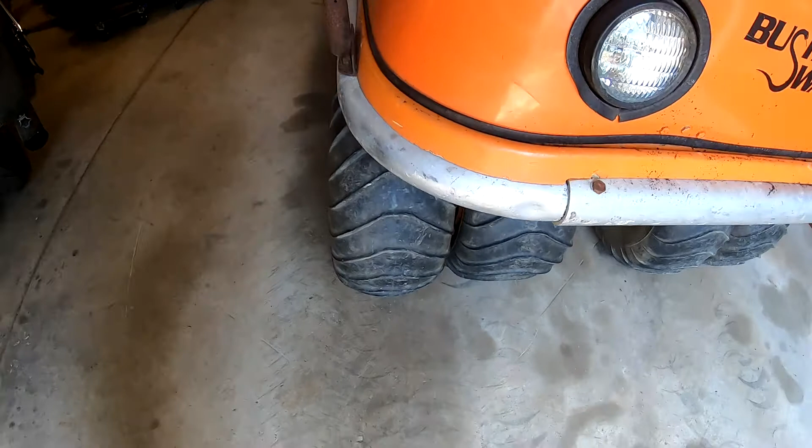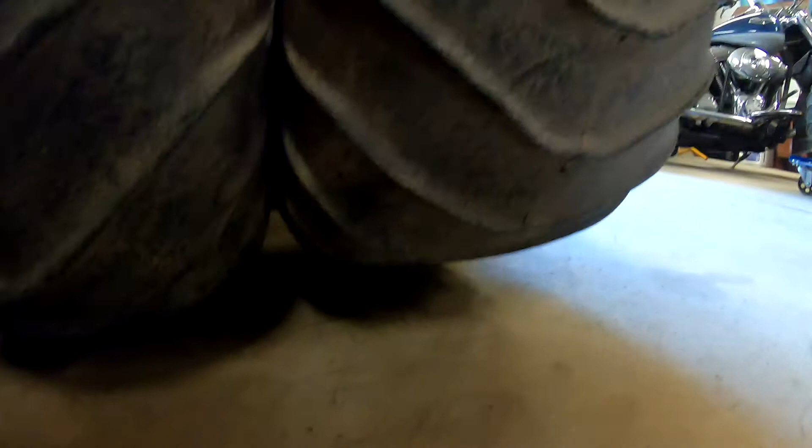As you can see, when there's a tube in, it's sitting pretty nice. I don't know if this camera will get the angle right, but when there's no air in the tires, they're a different size altogether. They're just way smaller and they're not doing anything, just being a nuisance. Look here on the back, this tire is actually right off the ground. Can you see that? Right off the ground, it's so small because there's no air in the tire.

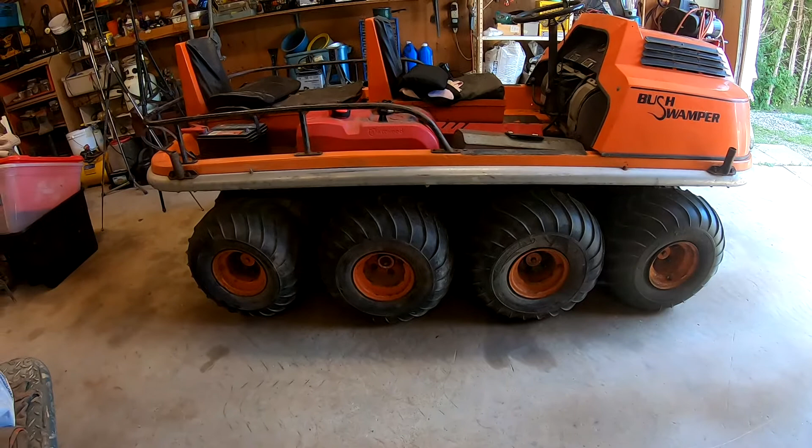tire being changed, and I edited the heck out of it. I want to show you in a little more detail what it takes to do one of these tires, because with the number of tires on this thing, I wouldn't really recommend this as a hobby if you don't have a tire machine. I can see myself removing tires all the time, doing different things, fixing punctures, and I just could not imagine trying to do this with one of those little manual tire machines. It's hard enough with the big car tire machine.

I'm kind of surprised the car tire machine even works, but it barely works. So let's carry on, I'll set up some tripods here and fix the rest of these tires. I think there's 3 or 4 more to go. I have a whole bunch of tubes up there yet, I don't know how many, probably 8 left I can choose from. Let's roll.

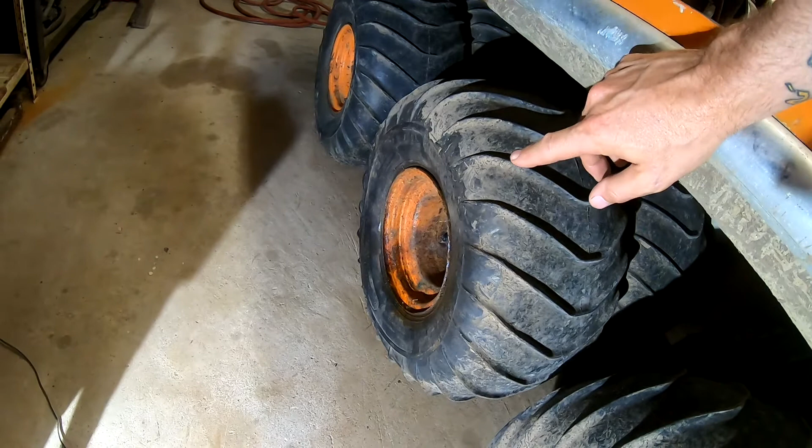Okay, well, apparently just standing near this machine causes problems with these inner tubes, because I'm just standing here and all of a sudden I could hear hissing coming out of this tire. I'm walking back and forth looking what's going on, where's the hissing coming from, and I get right down onto the valve there, and it's not the end of the valve, it's down around the hole of the rim, and this tube just failed, just sitting here. The tube inside the tire failed, brand spanking new. I just don't even know what's going on.

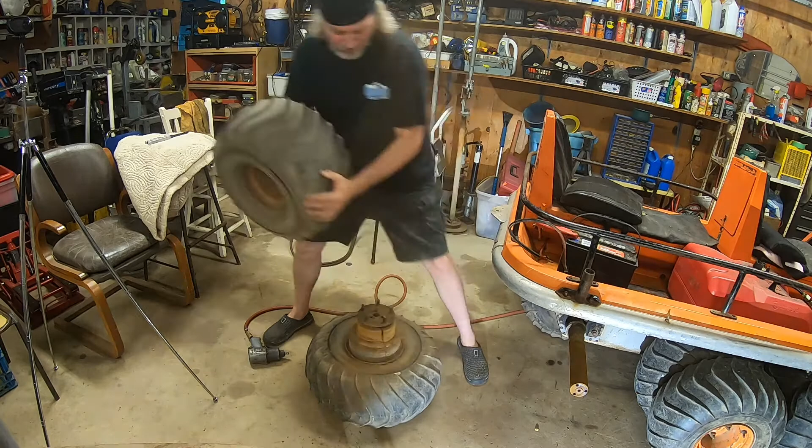Now, you probably noticed I can't break the bead on the bottom of these little tires. This thing just won't go up to the rim. So I got to flip it over, do the underside of the rim first with this guy, and then flip it back over and do it the right way.

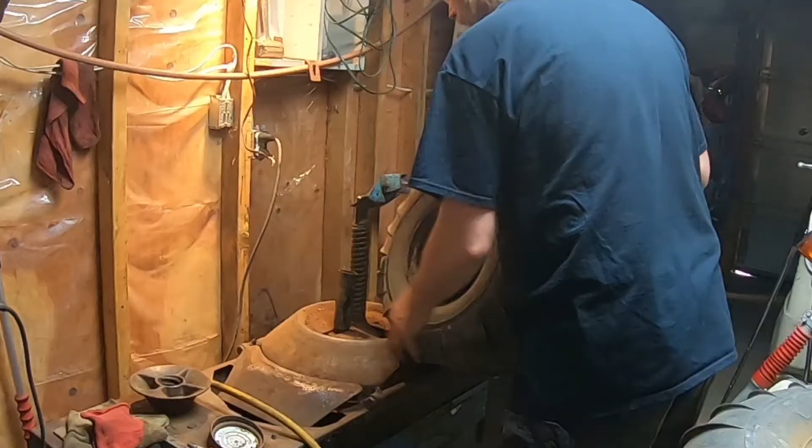Now the other thing I did, not sure if you can see this, but the pin here that holds a car rim in place when the whole thing turns, won't reach into this deep rim of an ATV rim. So I've had to square off a little bit of round tubing to slide over that. And then when I put it on, valve side towards me, I just slide this little bolt down through, and then it won't turn.

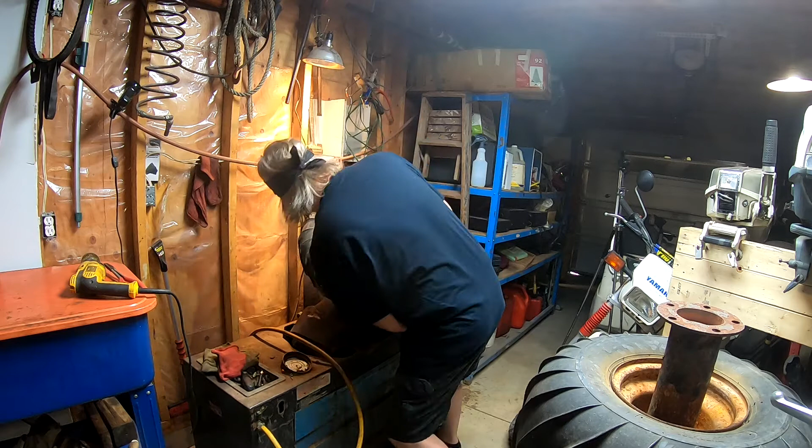I'll have to hold the tire. There we go, there we go.

I'm just going to clean up the inside of the rim that's all rusty because the tube is going to be resting on that, and I know it'll wear through the rubber tube pretty quickly, I would think. See? Not even a thing. There you go.

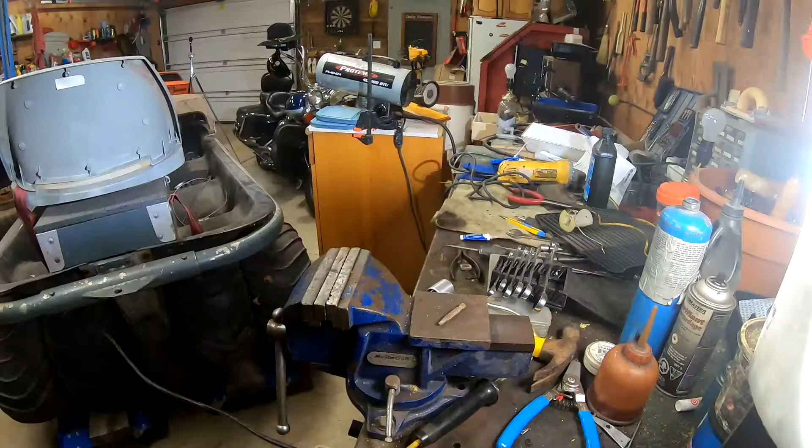Maybe, maybe, there we go. There it goes. Woo. Not even close, enough. All right, every single lug nut I take off this thing has to be

tapped because they're just going on way too tight. There's 80 lug nuts on this thing. I should really make you watch every single one, but I wouldn't do that, of course.

A little bit of tapping lube, drop the tap into it, and get on it.

Clean off the top, I don't have airline over here, but I'll just use a rag, and get on to the next one.

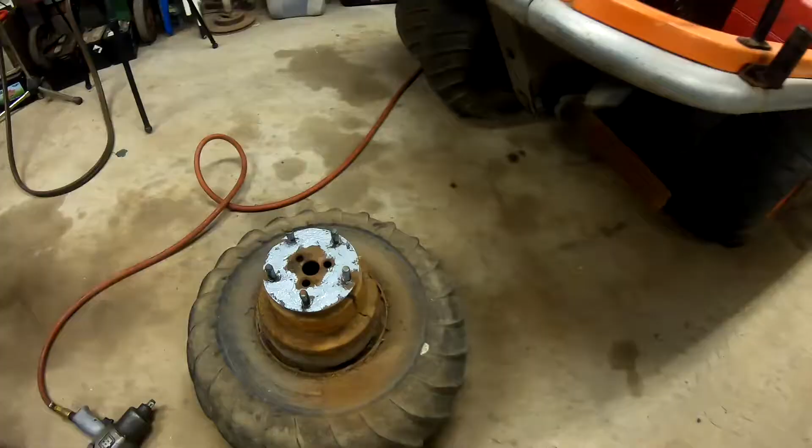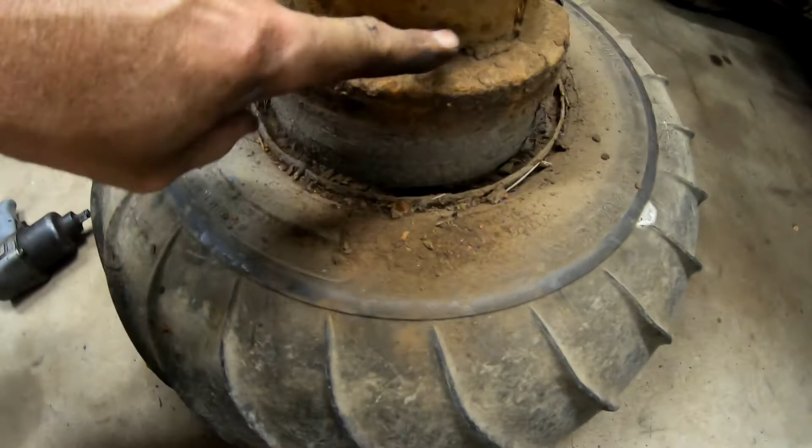Okay, you'll see I've got anti-seize on everything, on the plate that the rim is going to bolt to, and on the threads. Also, I'm not sure if I showed you this last time, but there's little foam inserts between the rims that just help for flotation. I'm not going to try to pull them off because they're all nice and tight on there right now, but they're like two halves that fit together. It's a good idea to help with flotation, especially if you don't have a lot of air in your tires. All right.

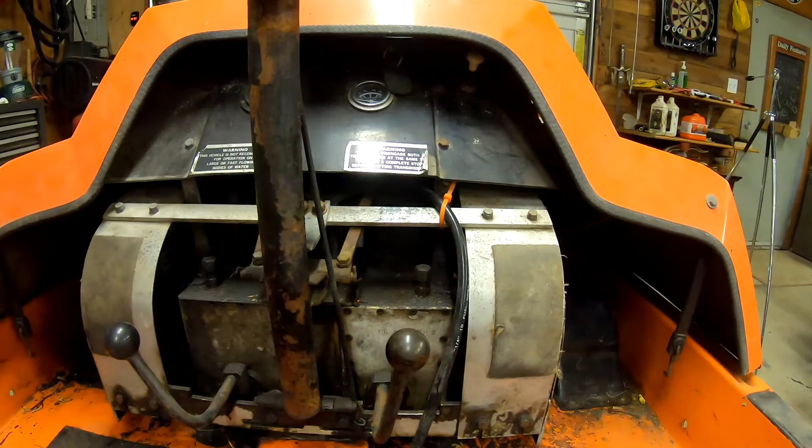All right, let's check these transmissions. I see there's a bolt on top, and I don't even know what's going on here. I'm just going to try loosening the top one and leave the bottom one in first. Get that out of the way.

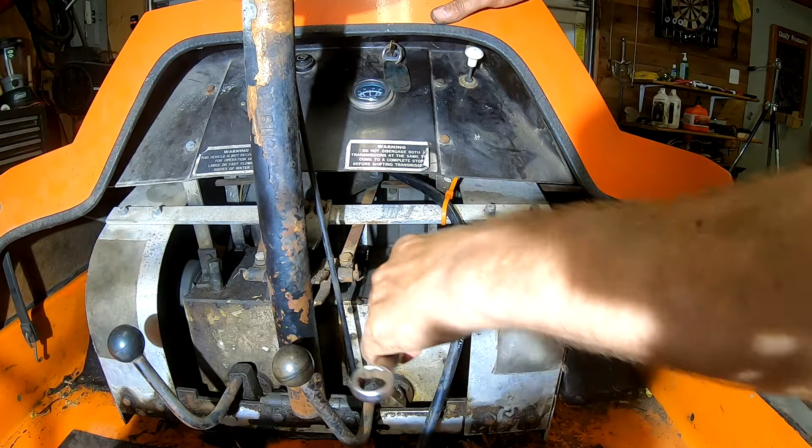What's that? 11/16 maybe? Perfect. That turns nice and easy. So maybe this will be a dipstick. I'll try to get my big hand out of the way there.

I would think this is just a cap. And oh, it's a dipstick. Look at that. Of course it hits the brake rod. It'll go by, you just gotta turn it, force it just a little bit.

Oh, I don't see anything on this stick. I don't think there's anything down in there. So it's probably a good thing I didn't go for a big marathon ride. No, oh, there's a little something on the tip there, but that's not good enough for me. So it doesn't look like a fun job adding to that teeny little hole. Probably the idea is you can remove the whole thing, and then you've got a bigger hole to work with.

You know something, I just realized there's no mark on the dipstick. Well, how hard would it be? I've got to go look at the manual because it's probably a measurement of some sort. I would think if it's touching at all... no, that rod goes right to the bottom of the tank. So I just had a little dripping on the bottom there. I've got to go read the manual.

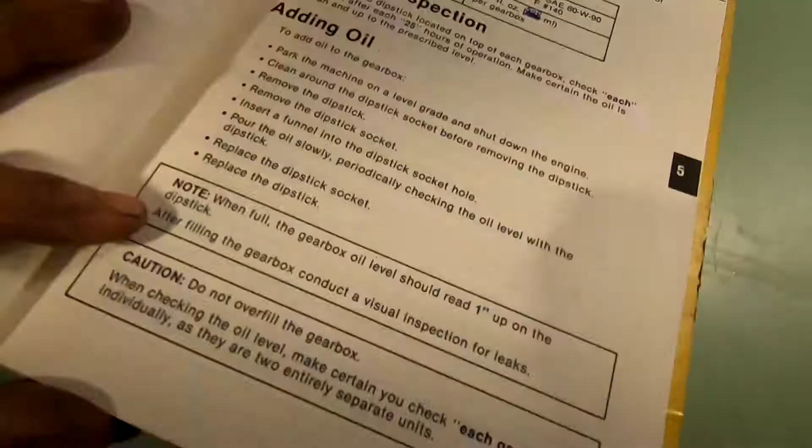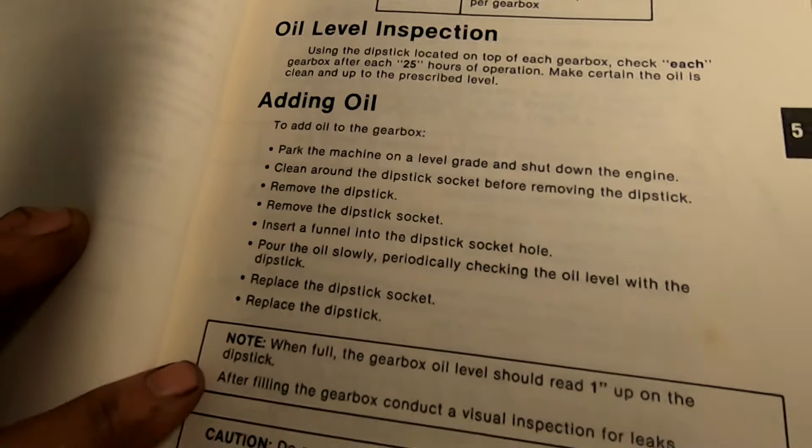Okay, gearbox oil. We want 80W90 oil in it. I forget what I've got out there. All right, so just do all the things that I already did. And then here we are. It's full when it's 1 inch up on the dipstick.

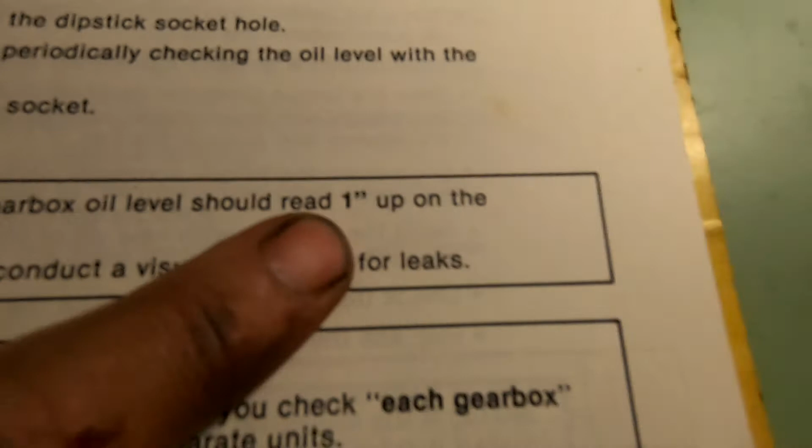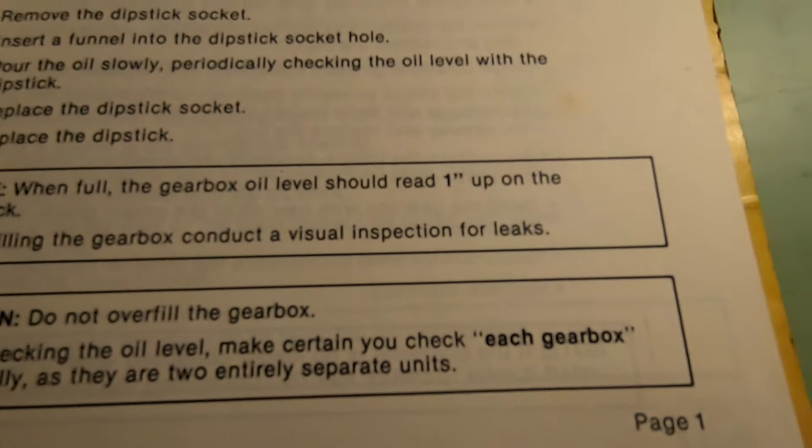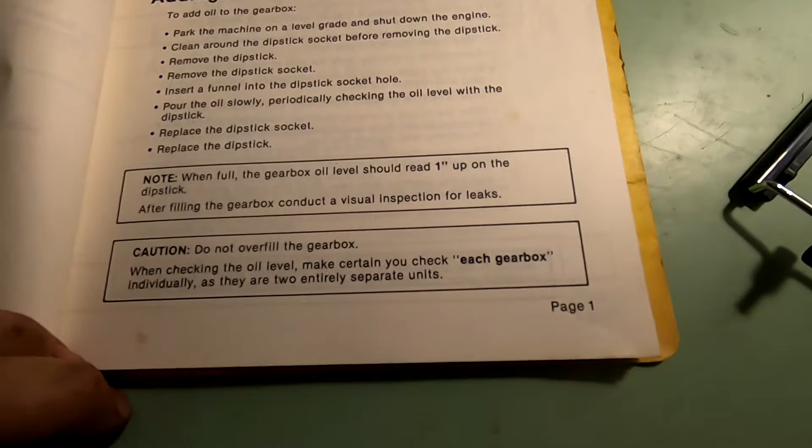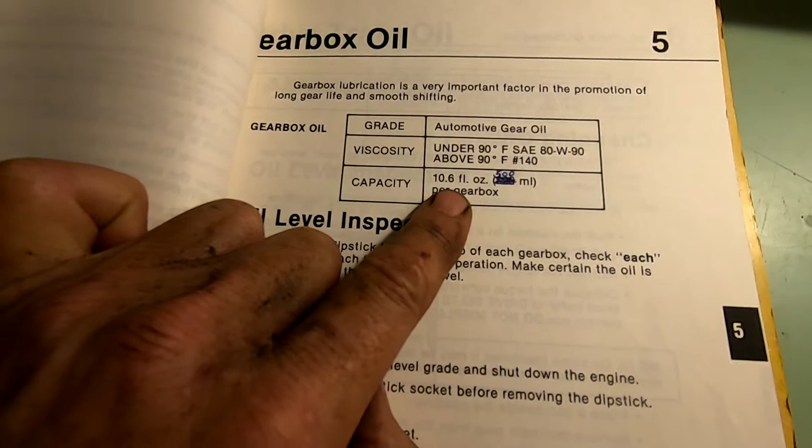You just got to keep throwing some in. And I suppose, if it was empty, but you don't know if it's empty, you're just going to have to keep reassembling it and checking it with the dipstick, taking it all apart again until you get 1 inch. All right, enough.

Okay, I think that got loose. There we go. Oh yeah. Just be careful so a big gob of something doesn't fall down in there. Oh yeah, there we go.

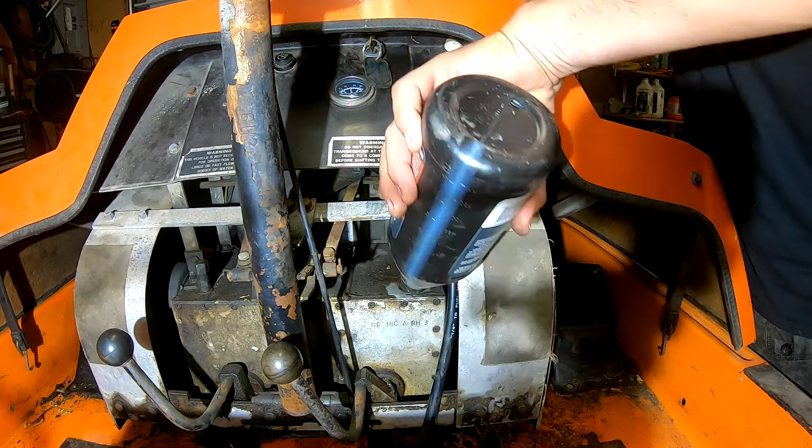God damn it. Oh boy.

I think it's up an inch. You know what I'm going to do? I'm going to make a dent, like a mark in this rod up 1 inch, just so that I don't forget next time.

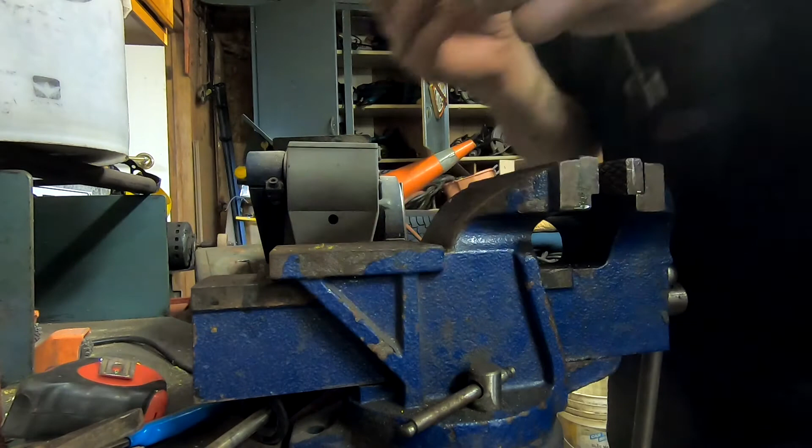All right, first things first. Measure up an inch and make a little mark with the pen or marker. Okay, so I got that teeny little mark there. Now I can hit it with a chisel lightly.

Okay, hammer. Don't need those anymore, I don't think. Okay, hold it down with the chisel and give it a tap. Okay, now there is a little mark in the stick. Very little, but that's all you need.

Now the dipstick tube for the gearbox in an Argo is an actual tube. It's not a solid rod like this, so it would actually crimp it. This is just leaving a little mark, so maybe I'll just run the other side and make another little mark. There you go. Yeah, that's something to look at now.

Okay, we are right about at the crimp mark. So here we go, 1 inch up on the stick. We got oil in that one. That's all she needs.

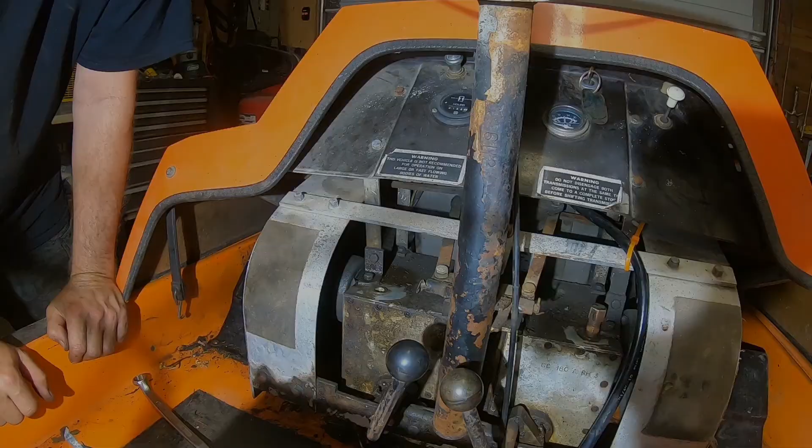Just snug again, that'll do. Other side. There is a little lip so that if dirt was like a thin layer on the transmission case itself, it's not going to jump up and into that hole.

All right, I know from experience that that's going to be the right amount. Oh, that's fine. Okay, I feel good about that. Now, what about...

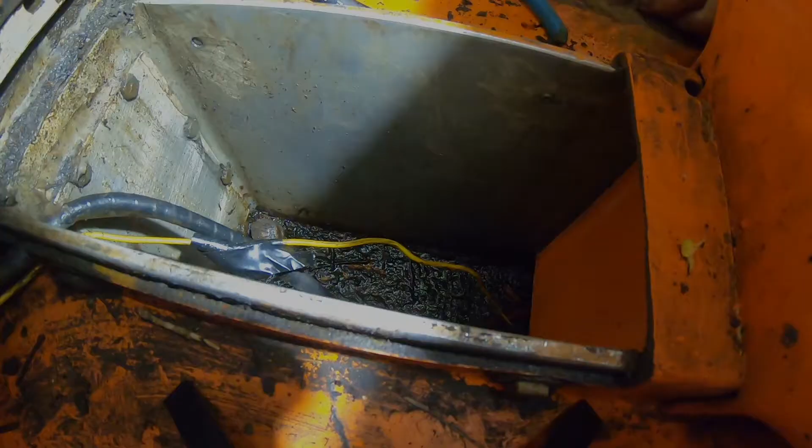Okay, let's take a look. What do we got down here? Oh boy, you'll see that little plumbing fixture in the upper corner there. It's just on by hand, so I'm just going to turn that off. And it is a dipstick.

Oh, look at that, it's got lots of goop in there. Now, it also says in the manual it's supposed to be 1 inch up on the dipstick. There is a crimp mark this time, and it's actually up further than 1 inch. So I like that. So I'm going to put it back in and just do another check.

Yeah, that's all right, it's pretty gross. It's not clean oil, but it's a little bit above the mark. But I've decided that's fine. So I'll put this back in and just hand tight again, because tools are not going to work down in there.

Beautiful, that means all my fluids are up. We can go for a ride.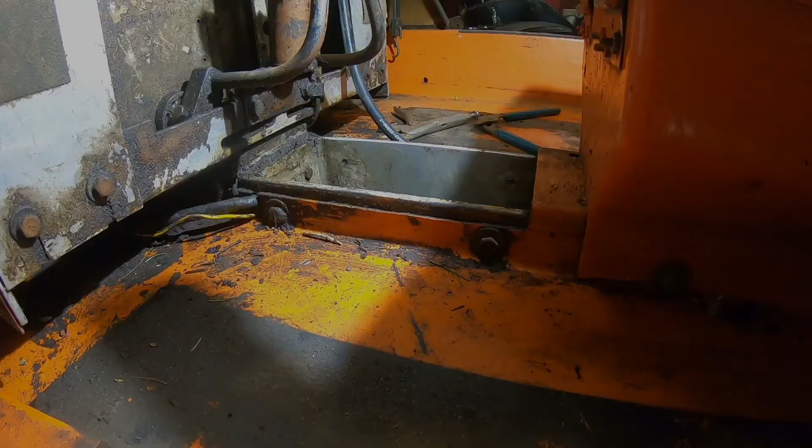Okay, that just snugs itself down on there. Oh, I wish I could just take some time and a couple of cans of degreaser and degrease this whole thing, but I'm way too impatient. I need to go for a ride like right away.